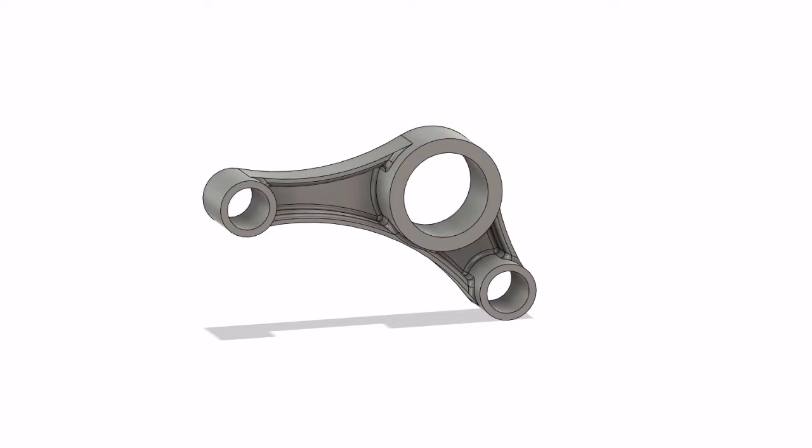Let's begin by first inspecting our 2D drawing. Notice here, on this view, the dimensions are referencing this point. With this in mind, we are going to place our origin here, same with the center point of this hole or circle. Let's sketch this geometry into our XZ plane, so that whenever we head to front view in Fusion 360, this view will be the front.

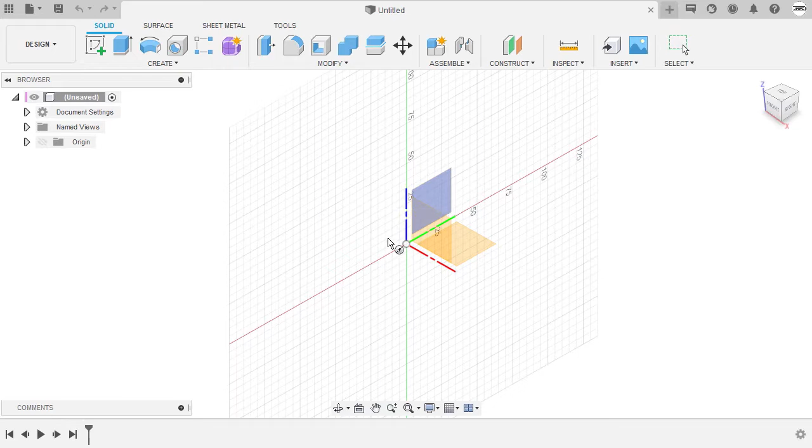Let's head back to Fusion 360. I'm going to hit C for circle, and this automatically leads us to sketch mode. Now we are asked what plane or planar face do we want to sketch to, so once more, we are going to sketch on the XZ plane. Selecting this, let's drop our center point into our origin.

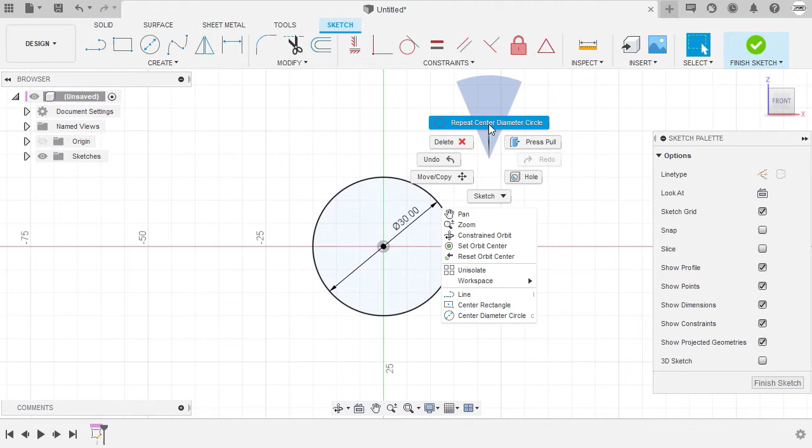The inner circle's dimension is 30. Repeating circle, I can right click, head up and select repeat center diameter circle, and this time our outer circle is 40. Hitting enter, let's clean our dimensions up. Left click and hold to place this here. Selecting 30, left click and hold, placing this here.

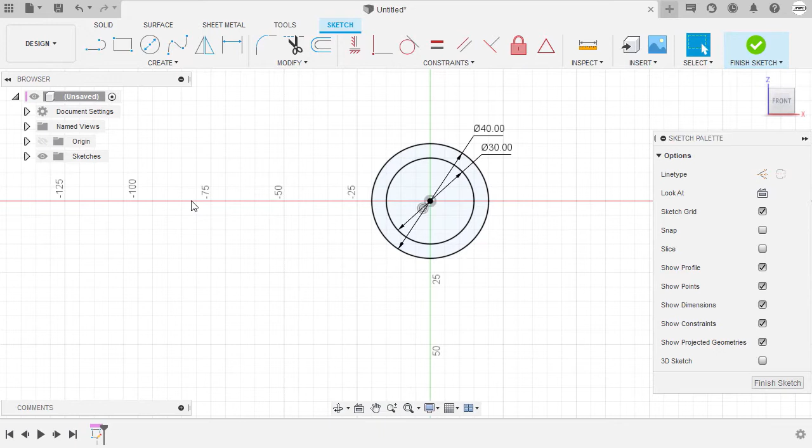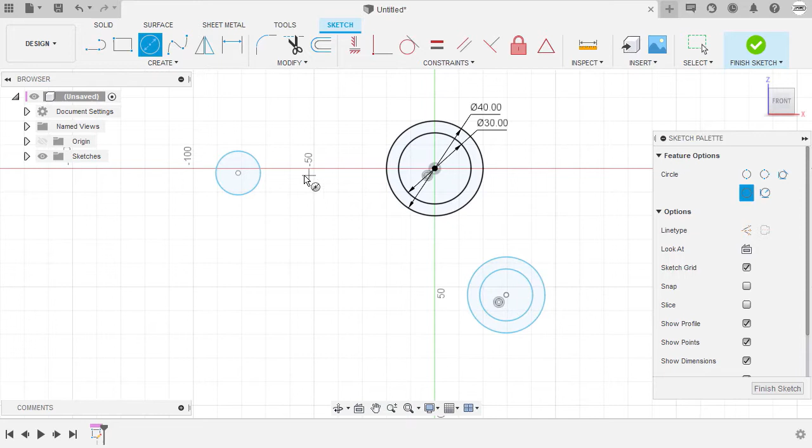Moving forward, let me zoom out and let's create another circle, the one to be placed here, so I'm going to hit C for circle. Let's create a circle here, left click. Notice I did not input any value or dimension for now. Creating another circle somewhere around here, left click. Create another circle, concentric with this circle, left click here. Create another circle here, left click and left click. Hitting escape, and now let's add dimensions.

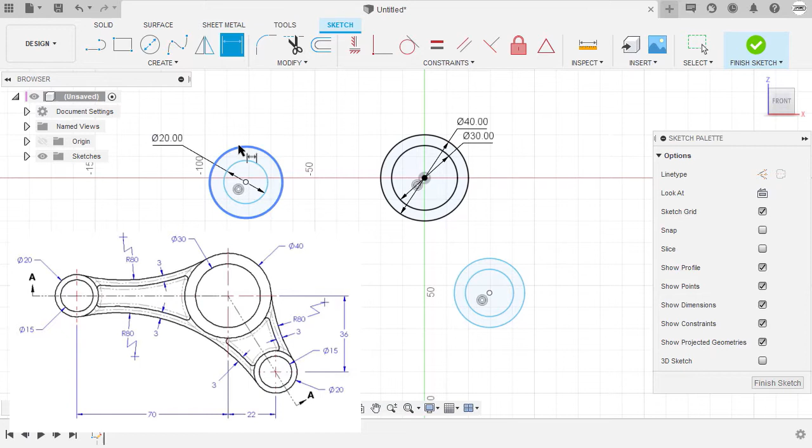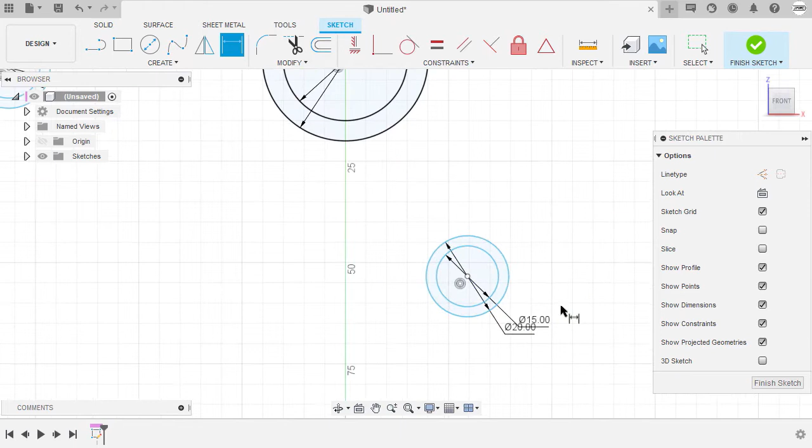I'm going to hit D for dimension. Let's dimension this outer circle to be 20. Dimension tool still active, this one, let's turn this to 15. Next, let's head over to the right. Select this inner circle, this one to be 15. And this circle to be 20. Let me zoom in and clean the position of these dimensions.

Notice the circles here has the same dimensions with the circles here. So with that in mind, I'm going to have the dimensions of the circles over here copy the dimensions of the circle over here intelligently. That intelligence is, I'm going to double click 15. Next, with this dimension highlighted in blue, I'm going to select this 15 over here, which means the dimension of this circle is now the same as this circle, having the parameter dimension or parameter ID of D4. So I'm going to hit enter.

Same with the 20, double left click. With this dimension highlighted, I'm going to select D3, the parameter name of this 20 dimension. D3 now here, I'm going to hit enter. Notice as I change the value of this dimension, let's say 25, this is now also 25. I'm going to hit undo.

Let's add some constraints. Notice here the center point of the circles need to be aligned to our origin horizontally. So I'm going to head up to constraints, selecting horizontal, selecting this center point and the center point or our origin. In addition, notice here, for these dimensions, we plugged in a parameter ID. In addition, I can also select an equal constraint to have these two circles same with the dimensions over here.

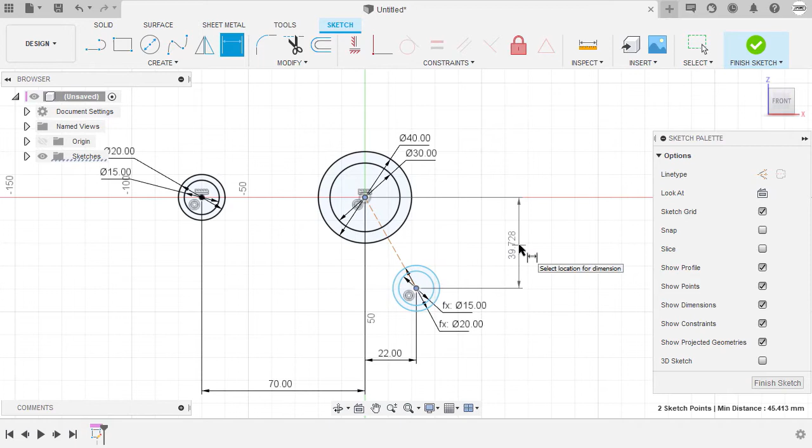Let me hit D for dimension and let's add some dimensions, selecting this center point and this center point. Let's place our dimension here, left click, key in 70. Selecting this center point and the center point, let's place our dimension here, key in 22. Next, selecting this center point and the center point, let's move our cursor to the right. Left click here to place our dimension and key in 36.

Notice before we added dimensions and constraints, all of these entities were once in the color of blue. Notice now it's all black, and in addition, that means these are all now fully defined, as I cannot force to move them any longer.

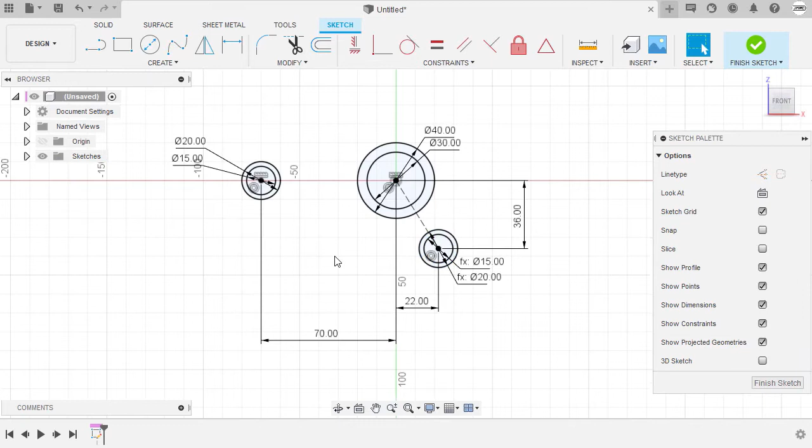Moving forward, let's add the arcs to connect these circles. I'm going to hit S for shortcuts and I'm going to type ARC, and we are going to select 3-point arc. Let me zoom in. Left click here on this intersection and left click here at this intersection. I'm going to move down and notice the inferred tangent constraint on the right.

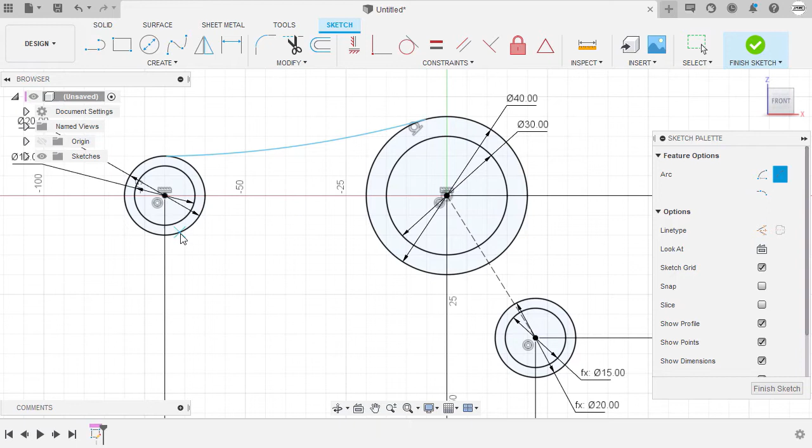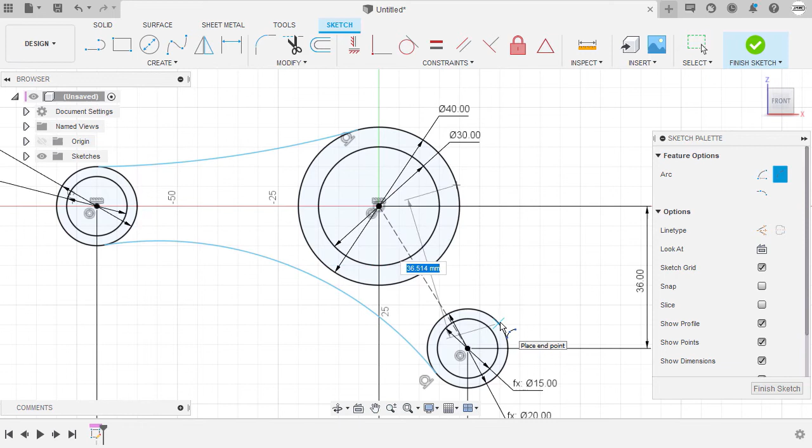I'm going to commit to that. Left click, create another arc from this intersection. Left click here on this circle at the right, notice once more the inferred tangent. Left click, let's drop our point here at this intersection. Left click at this intersection and notice once more the inferred tangent constraint.

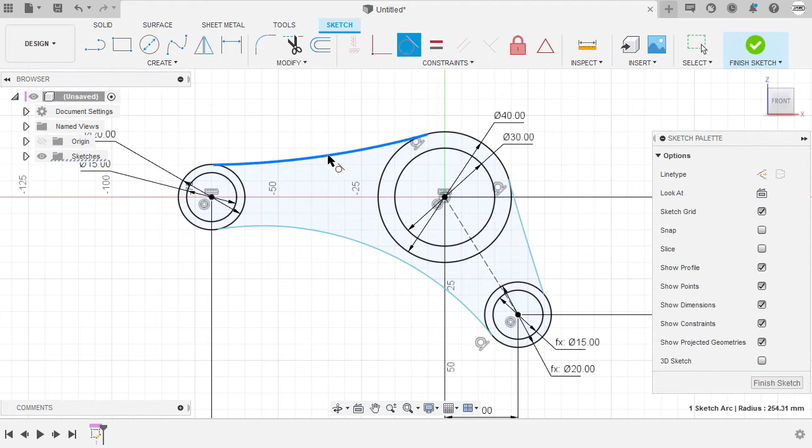Hitting escape. Next, let's add the tangent constraints on these entities. I'm going to head up to constraints, selecting tangent, selecting this arc and this circle, this arc and this circle, this arc and this circle.

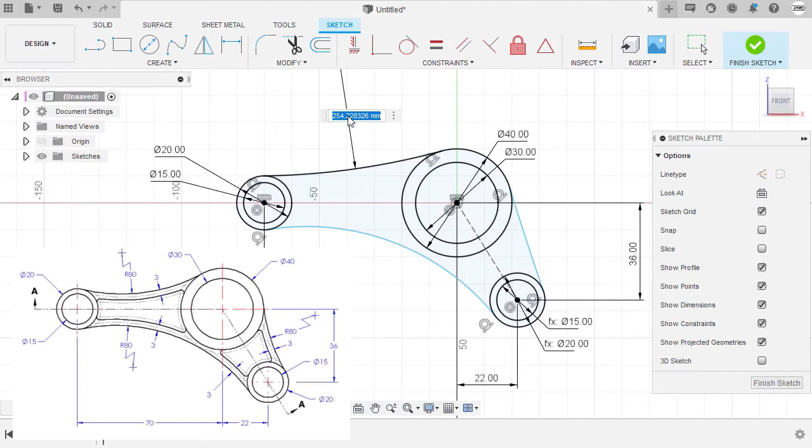Hitting escape. Next, I'm going to hit D for dimension and let's dimension this arc. Let's start off by selecting this arc, the value to be 80, hitting escape. Next, these two arcs also have a radius of 80.

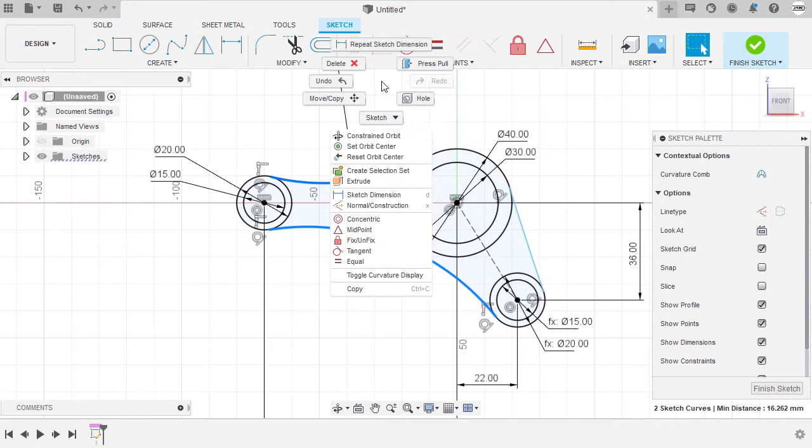So I'm going to select this arc, hold control and select this arc, right click. Once more for you to see, right click and select equal. Notice equal constraint still active. I'm going to select this arc and this arc.

Hitting escape. Moving forward, let's offset these arcs by a value of 3. So I'm going to hit O for offset, and I'm going to disable chain selection. Selecting this arc, I'm going to move this slider down, key in 3.

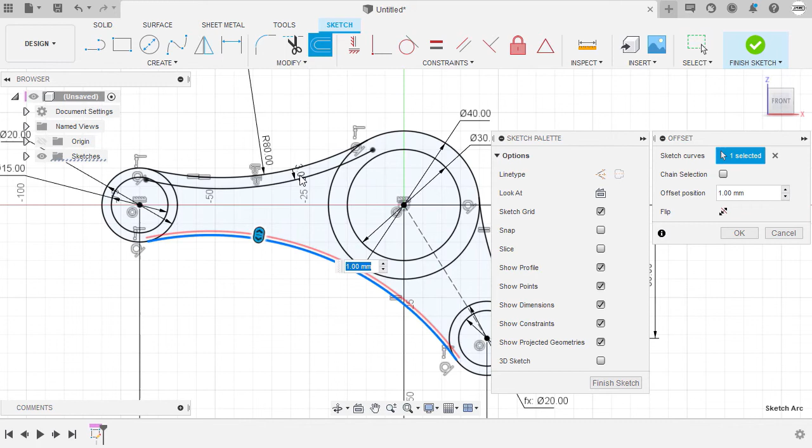Let's repeat offset. I'm going to right click to enable our marking menu, selecting repeat offset, selecting this arc. Next, notice this dimension field is currently highlighted, and I prefer the value of this offset to be 3 as well. So with this highlighted, I'm going to...

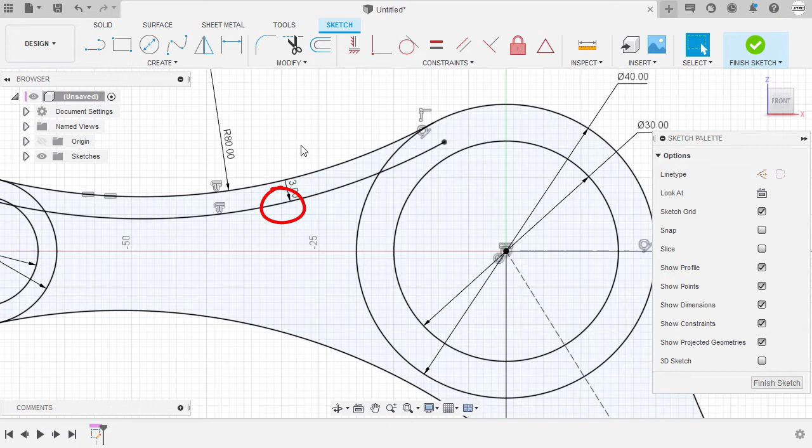identify the parameter ID of this 3 dimension. So I'm going to hit cancel for now. Hover over 3, so notice the parameter ID is D11. With that in mind, I'm going to select offset once more. Select this arc and key in D11. Hitting enter.

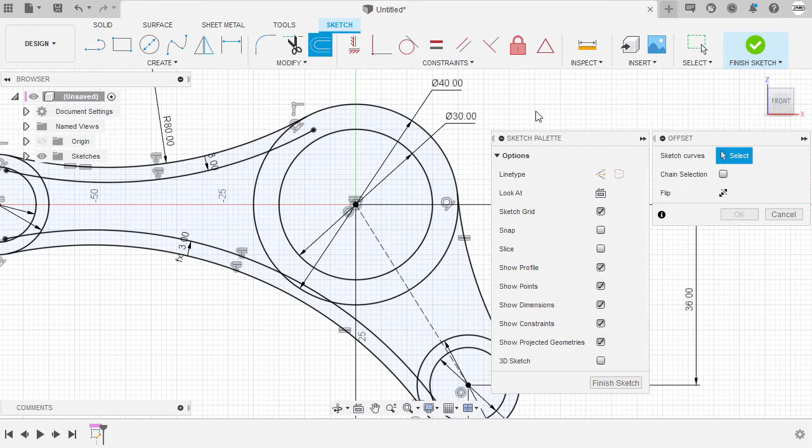Repeating the steps, right click, selecting repeat offset. Let's offset this arc as well and key in D11. Hitting enter. Let's trim out the excess entities.

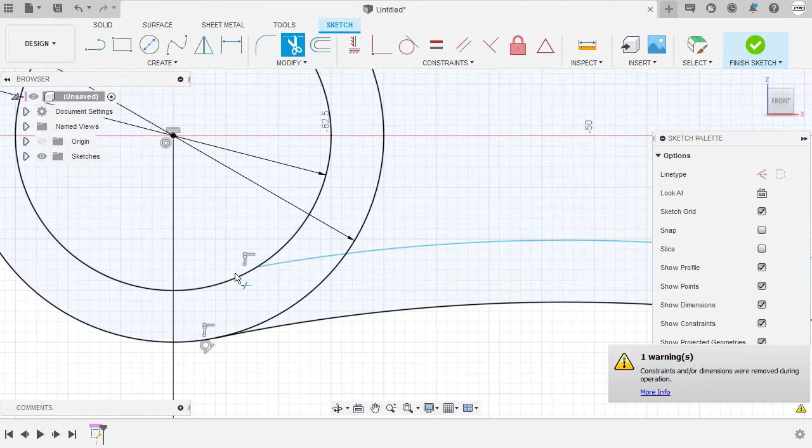I'm going to hit T, which is the shortcut for trim. Let's start by trimming out this excess arc segment. Notice, whenever we do trim, we may possibly lose a constraint or dimension. Selecting this portion of this arc. Let's trim this one. Left click this one. Let's trim out this one.

Selecting this, let's move to the other arc, trimming this out. Let's trim this out, same with this arc segment. Hitting escape. And notice, we lose all of our dimensions.

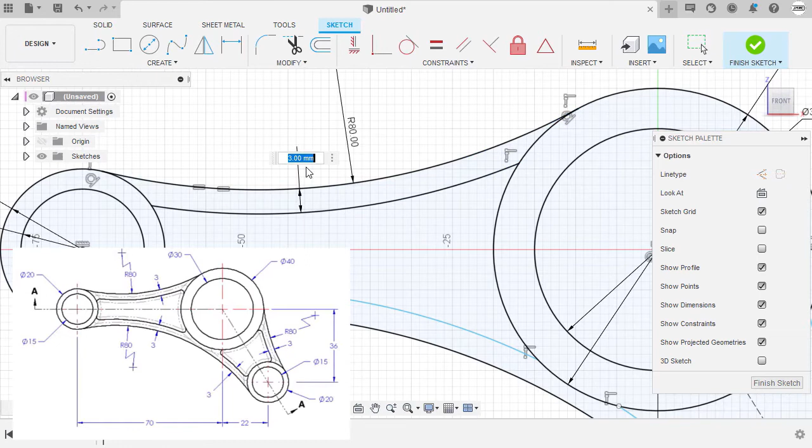So I'm going to hit D once more. Let's dimension the distance between these two arcs to be 3. I'm going to hit escape and let's identify the parameter ID of this dimension, which is D14.

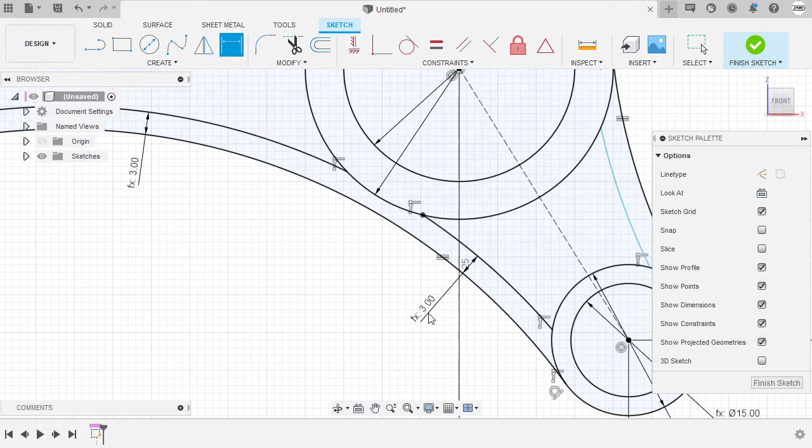Hitting D for dimension, let's dimension this to D14, hitting enter. Same with these arcs, D14. And finally, selecting this arc and this arc, key in D14.

Hitting escape. Our sketch is now fully defined or fully constrained. And from here, we're going to select Finish Sketch.

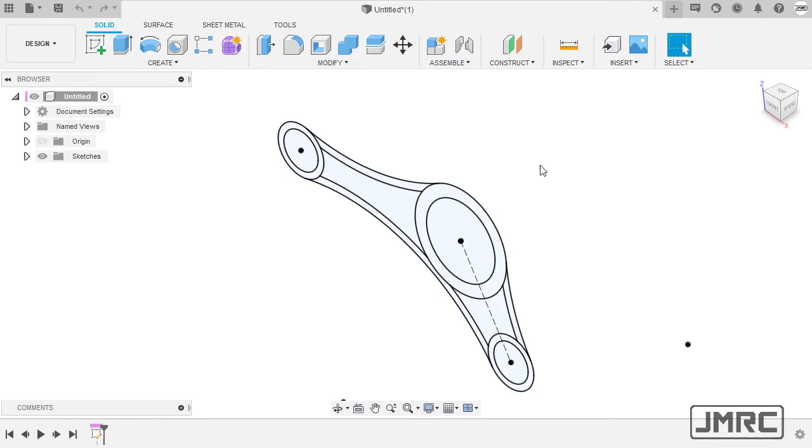Let's turn this sketch into 3D. I'm going to hit E, which is the shortcut for extrude. And for our target profiles, it will be these 3 cylinders.

Next, I'm going to pull this arrow to the left. And for the distance of the cylinders, because we are in the negative direction, I'm going to key in -20. Operation, new body, selecting OK. Notice, because these bodies are not touching each other, in this instance, we have created 3 separate solid bodies.

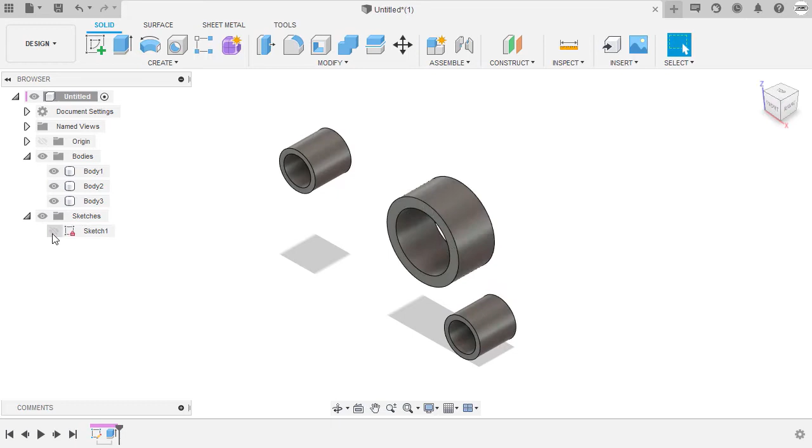Let's reuse our sketch 1, and I'm going to turn on its visibility by selecting this eyeball. Let's hit E for extrude and select this profiles. Notice I have 5 profiles selected.

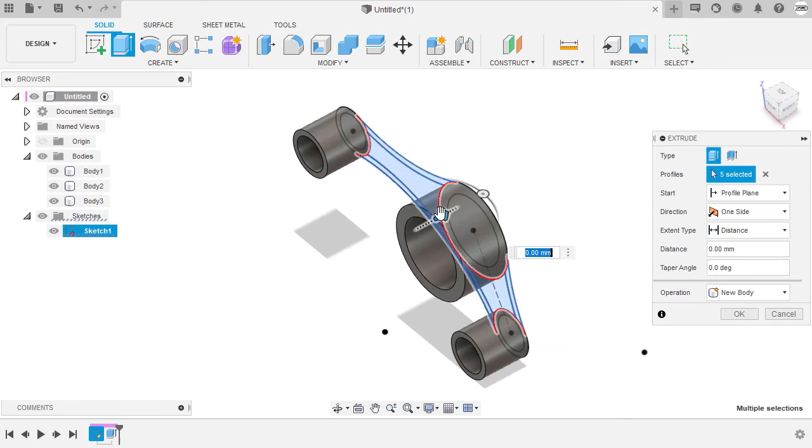Let's move this arrow, and to be exact, I'm going to key in -12. And for the operation, we're going to change this to new body. Selecting OK.

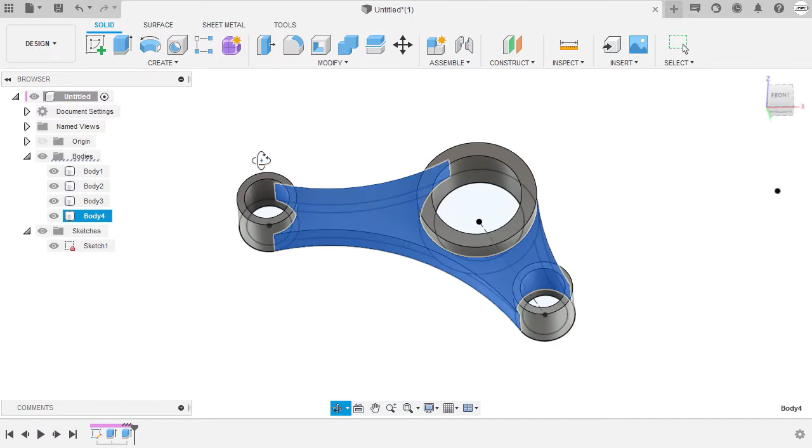Moving forward, let's hollow out this body by applying a shell. So I'm going to head up to modify, and before that, let's turn off the visibility of these 3 cylinders. Together with our sketch 1, let's now head up to modify and select shell.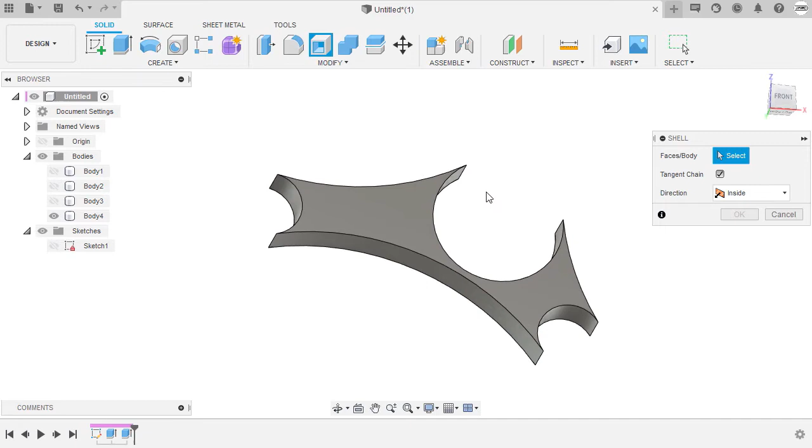Now for the faces or body, I'm going to exclude these faces. Holding control and selecting this face as well and this face. For the inside thickness, it will be 3.

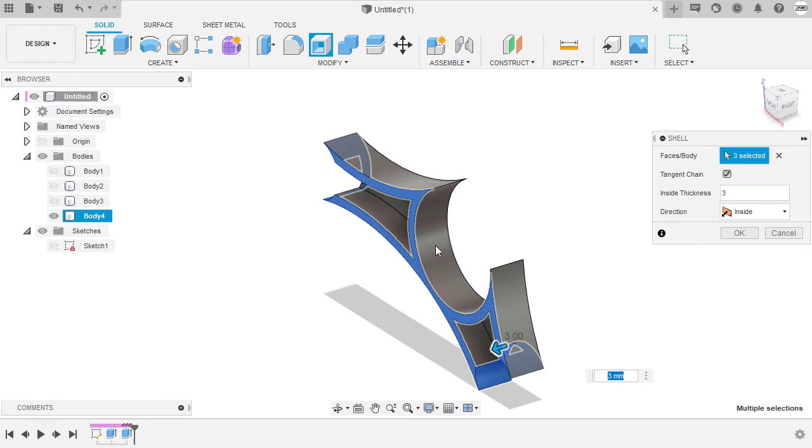In addition, let's also add this face as well. So holding control and left click. Inspecting, let's now select OK. So take note of its direction to be inside.

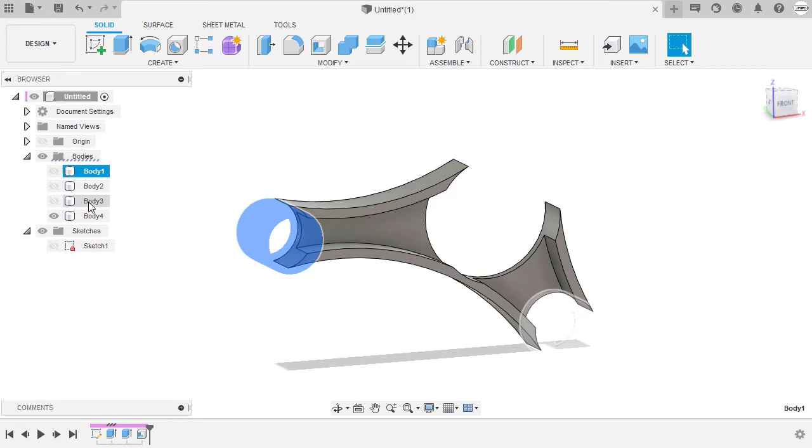Next, let's turn on the visibilities of these bodies. I'm going to select body 1, hold shift, and select body 3. And the shortcut for turning on its visibility is simply hitting V on our keyboard.

And finally, I'm going to head up to Modify and select Combine. Target body, any of the four will do. Let's select body 4. And for the tool bodies, let's select these 3 cylinders. Operation to be joined, and I'm going to disable new component and keep tools. Selecting OK.

Let's wrap things up by adding fillets. The shortcut for that is hitting F. Let's now select all of these edges.

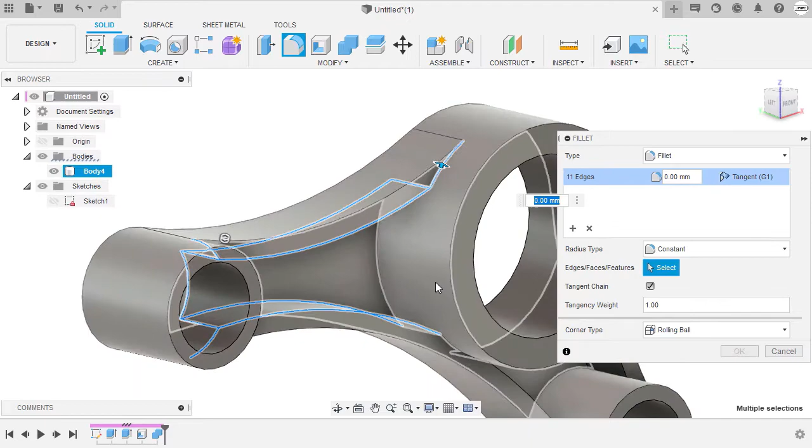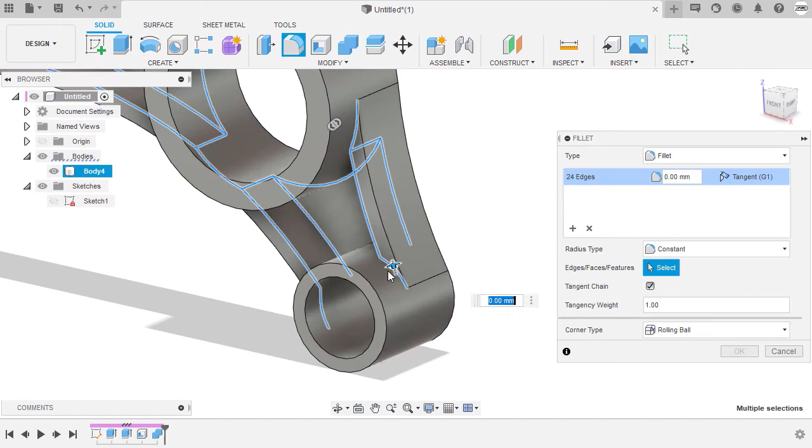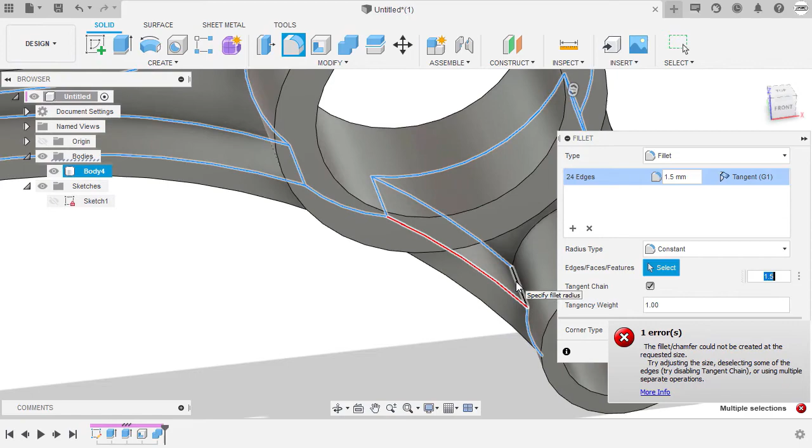Selecting this edge, selecting this edge. This edge and this edge. The radius to be 1.5. Notice we have an error. As we select all of the target edges, this error will soon be gone. Adding this edge as well. And this edge. Let's check. Okay, so the error is now gone. Leaving the defaults, selecting OK.

And congratulations for completing phase 1 of this 2013 Model Mania Challenge.

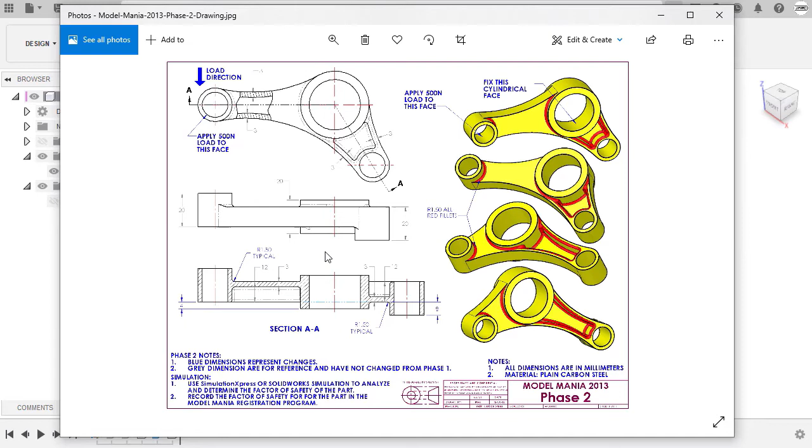Welcome back for the Phase 2 of Model Mania 2013. And the prominent change for Phase 2 is notice the cylindrical bodies have a new position. Let's now head back to Fusion 360. I'm going to move my timeline marker, left click and hold before shell was created. And notice here we have 4 separate bodies. What we're going to do next is we're going to move our body 2.

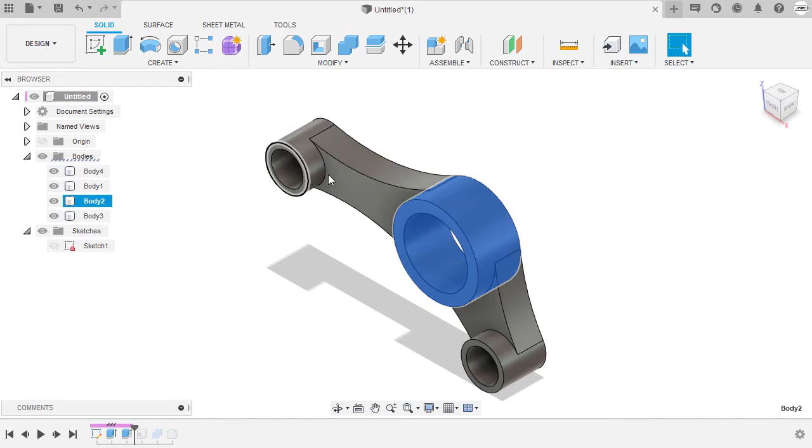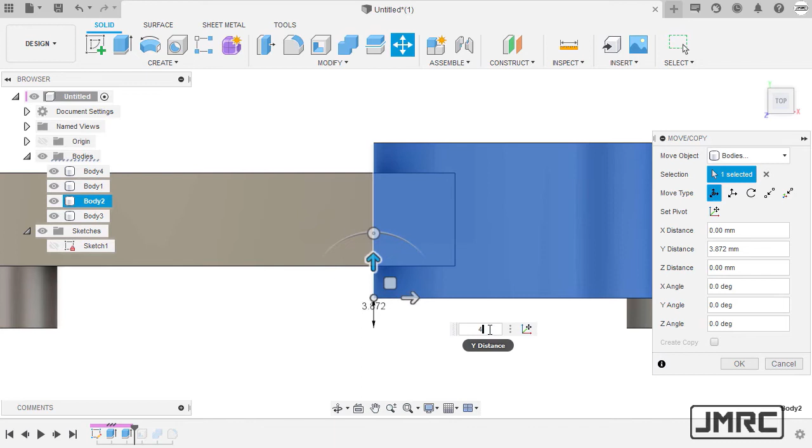So selecting body 2, let's head over to our top view and select this curved arrow pointing to the left. I'm going to zoom in. With the body 2 selected, I'm going to hit M for move. I'm going to move this body up. And to be exact, we're going to key in 4. Selecting OK.

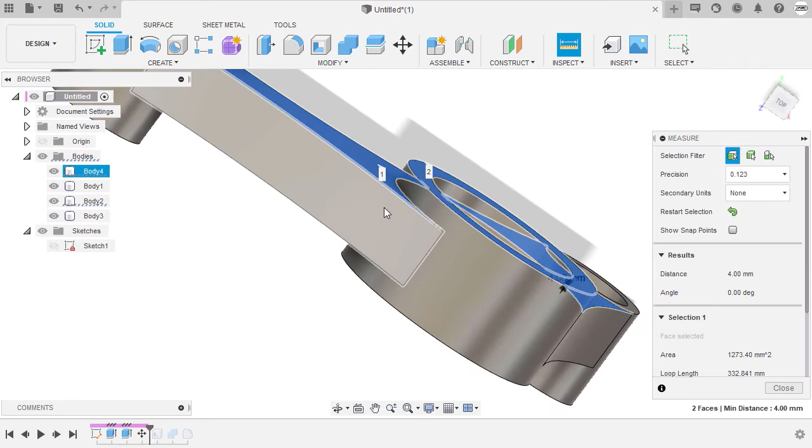And let's check if this body is at the middle. I'm going to hit I for measure, selecting this face and this face. The distance between them is 4. Let's restart selection. Now the distance of this face and this face should be 4 as well. So we're on the right track. Selecting close. Let's head back to top view.

And this time we're going to move body 3 up. With body 3 selected, I'm going to hit M for move. And let's move this body up, the edge of this body collinear with this edge. And to be exact, we're going to key in 8. Hitting enter.

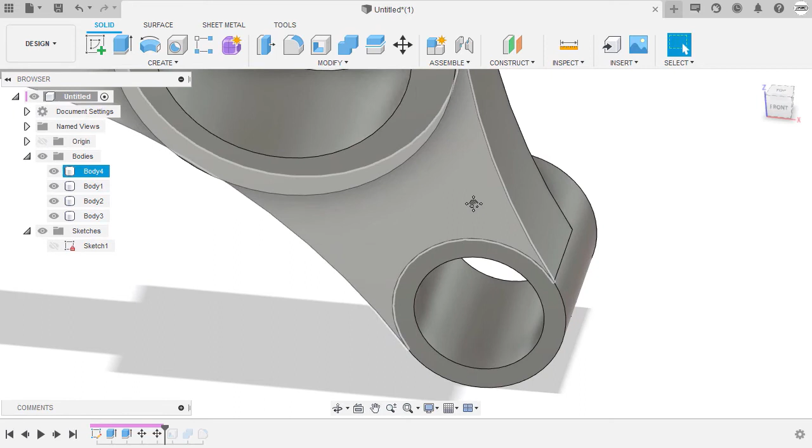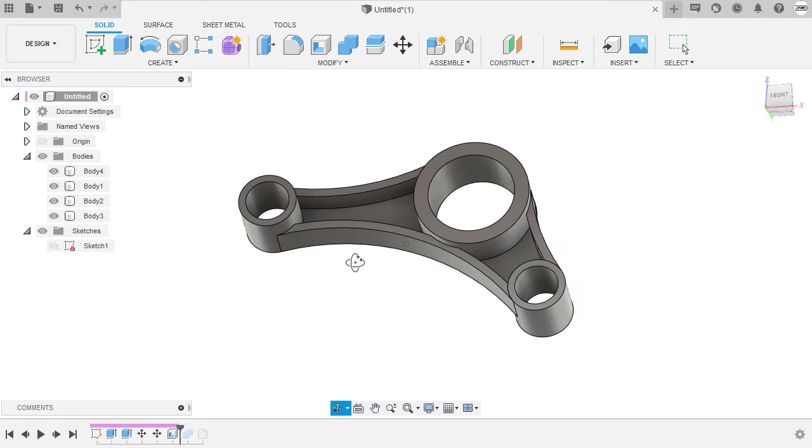And let's inspect. I'm going to hit I for measure. The distance of this face and this cylinder's face should be 0. So let's select this face and this face. So correct, it's 0. Let's now select close, head to our home view. Let's unsuppress the shell and inspect, moving our timeline marker, inspecting. Next, let's unsuppress combine.

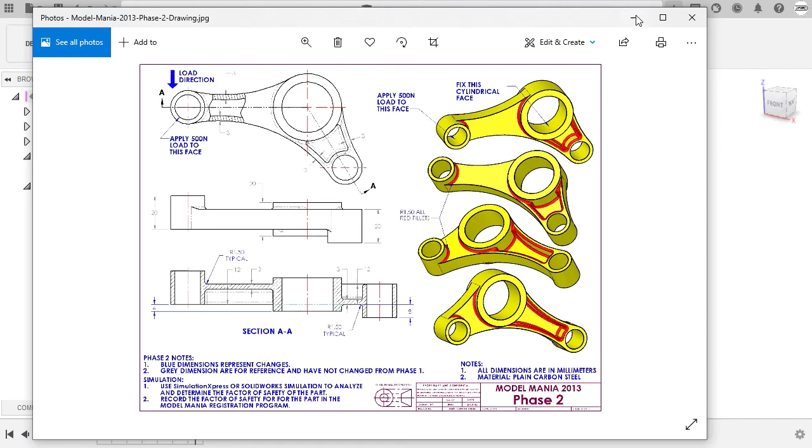Let's grab our 2D drawing and notice this time the thin wall feature is reversed and placed to the other side. Heading back to Fusion 360. Moving forward, our next intent is to move this feature parallel with this face. And for my personal preference, what I'm going to do is head over to Surface tab, and under Create, we're going to select Offset.

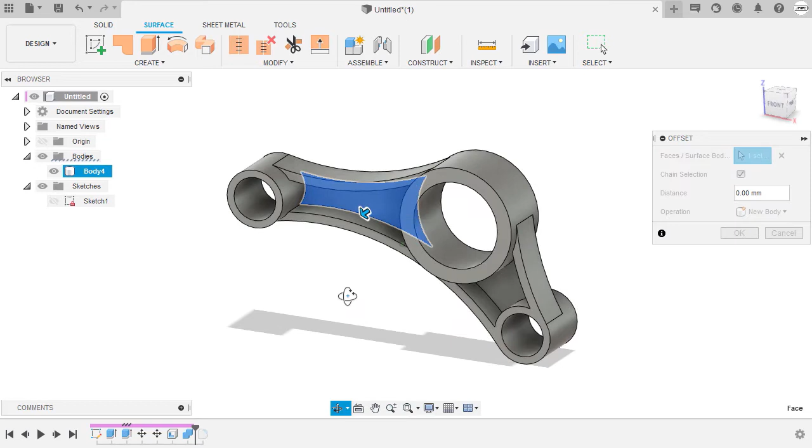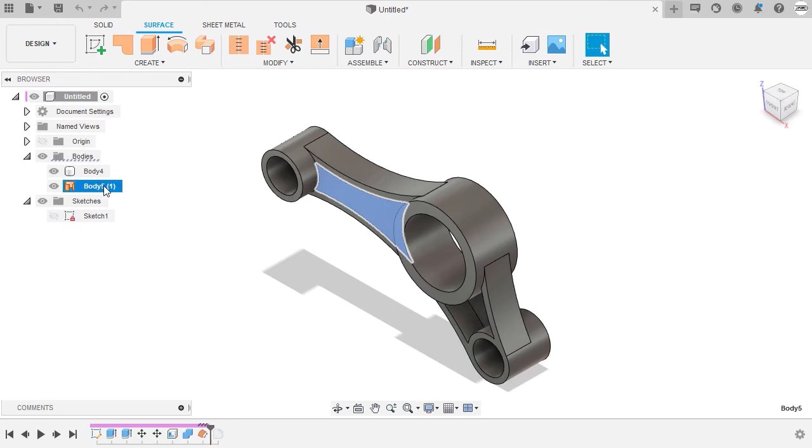The target face would be this face. Next, let me move this arrow. And to be exact, I'm going to key in 9. Let's inspect, Operation new body, and selecting OK. Moving forward, let's turn this surface body into a solid body. And to do that, I'm going to hit S to grab our shortcuts, typing TH and selecting thicken.

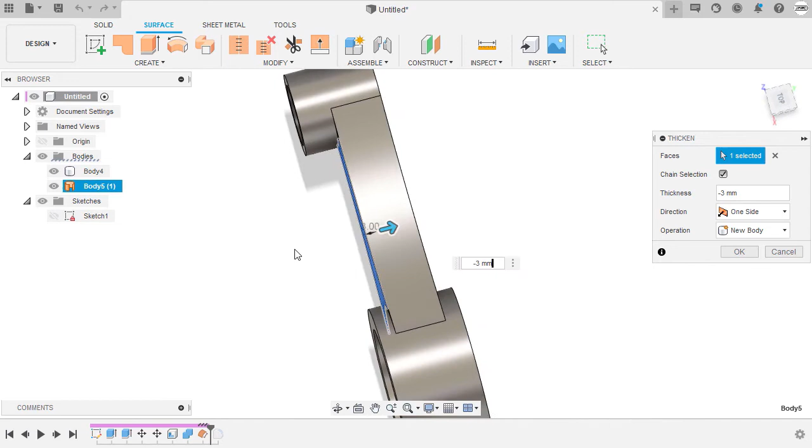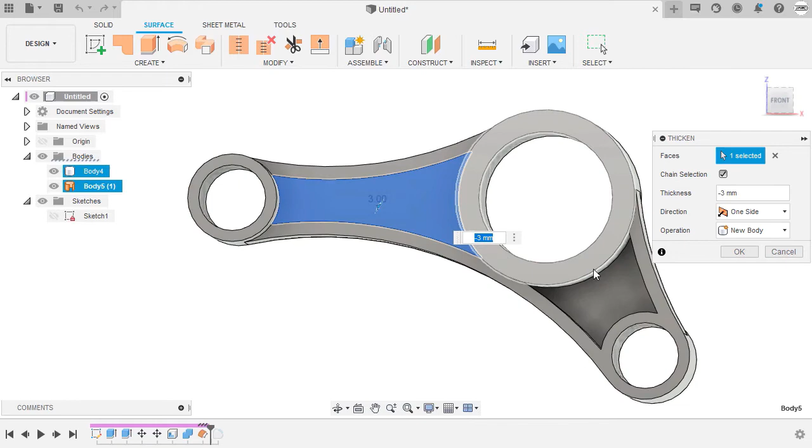Let's move this arrow to the other side and key in -3. And for us to see the change, I'm going to head over to top view and rotate this. Notice here as I press Ctrl 7 for wireframe view, this is now the new solid body. Heading back to shaded view, which is Ctrl 6, and Operation new body, selecting OK.

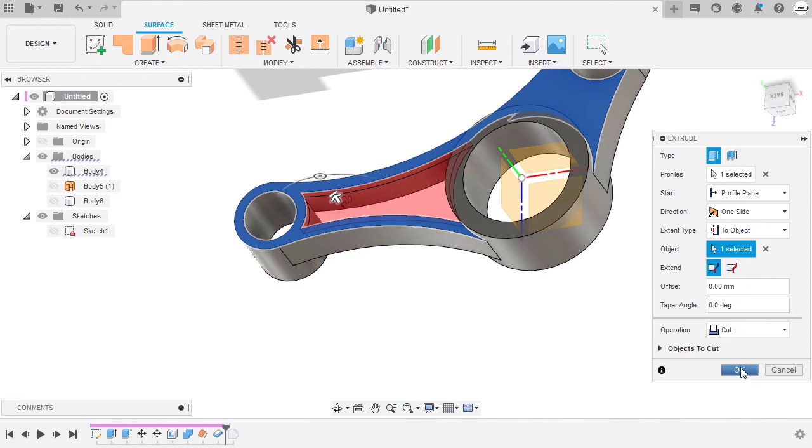Let's now remove this material over here. Let me turn off the visibility of body 6. Next, I'm going to select this face and hit E for extrude. Let me move our arrow to the other side. And for the extent type, I'm going to change this to object. And that will be up to this face. So notice the material removed. Operation cut, selecting OK. Let's now turn on the visibility of body 6.

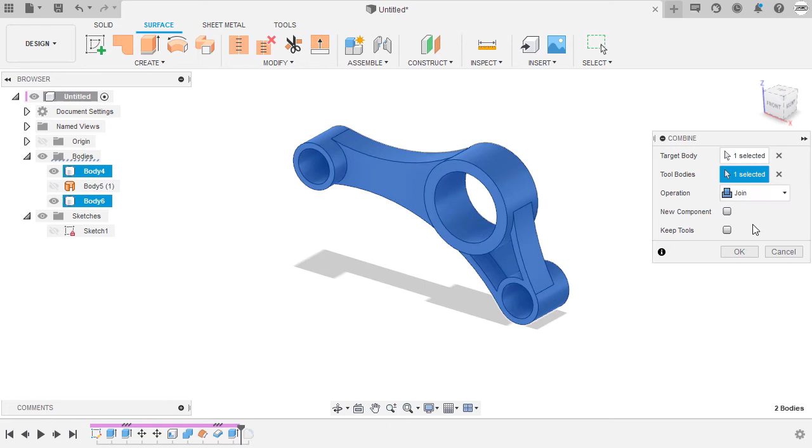Once more, hit S for our shortcuts, typing CO and selecting combine. Let's now combine these two solid bodies, selecting body 4. For the tool bodies, selecting body 6. Operation join and selecting OK. Let's now unsuppress our fillet. And notice it has errors, so I prefer suppressing this once more. Reselecting our fillet, right click and suppress features.

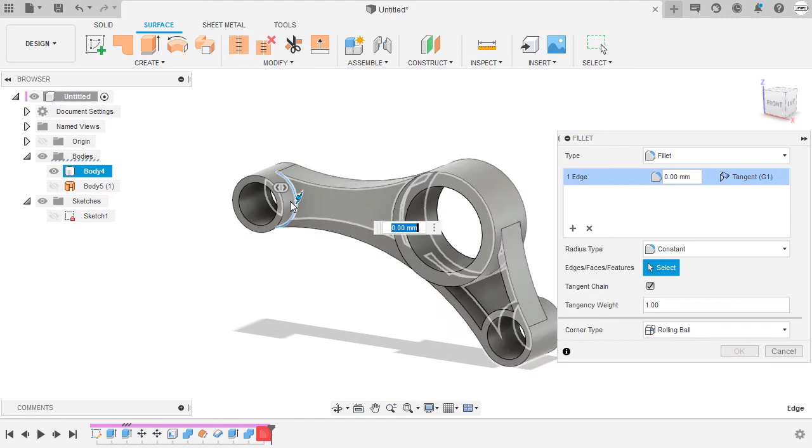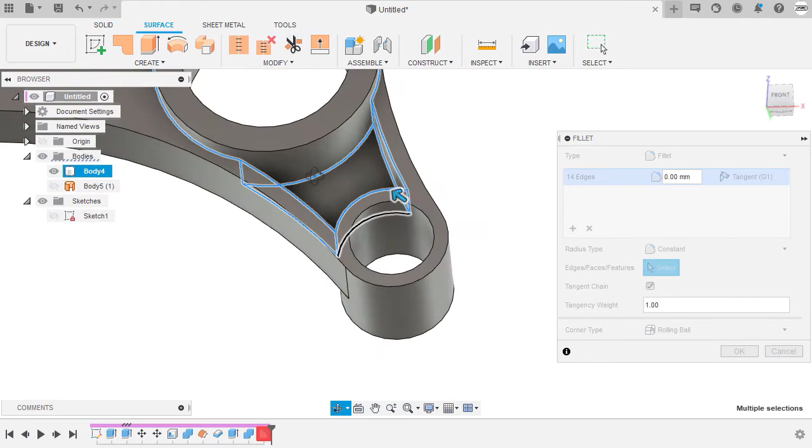Let's add a new set of fillets, hitting F, and let's select these edges. Selecting this edge, this edge, this edge, this edge, this edge, this edge, this edge. Let's head to the back.

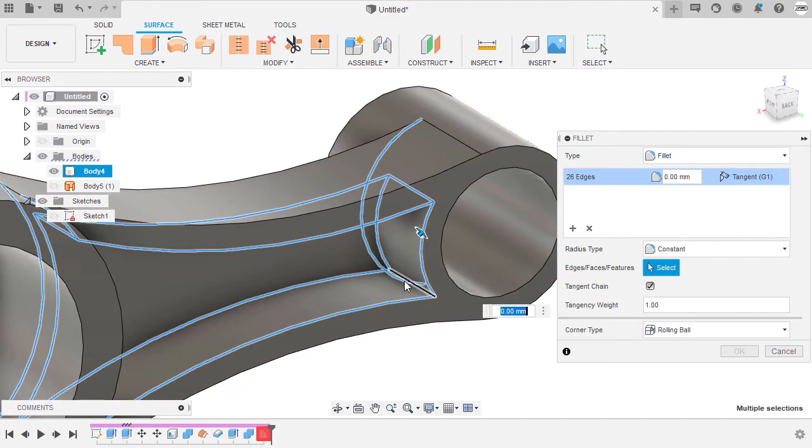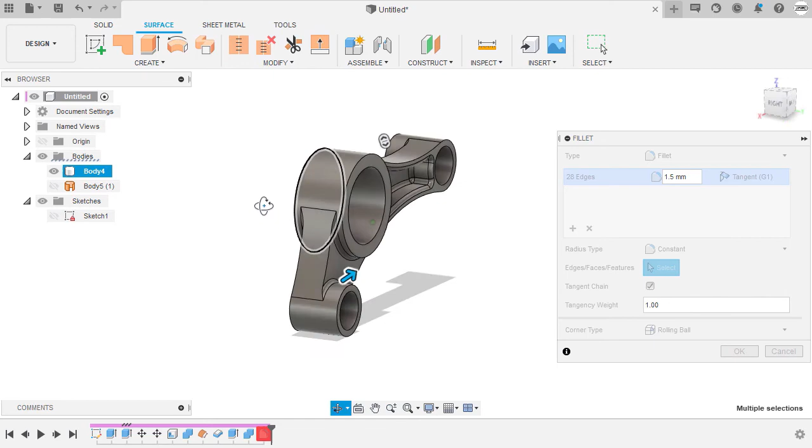Selecting these edges. Selecting this edge, and this edge. Also this edge. And for the radius, once more, it's 1.5. Inspecting once more. Leaving the defaults and selecting OK.

And congratulations for completing our phase 2. And join me in the next video as we conduct a simulation study to determine this model's factor of safety.

Let's now create a simulation study. And before that, let's clean up our bodies. I'm going to select the surface, right click, and select remove. The advantage of remove is we can still bring back that surface by simply suppressing this or deleting that remove command. Hitting undo. Next, let me delete this fillet that we had in the previous phase.

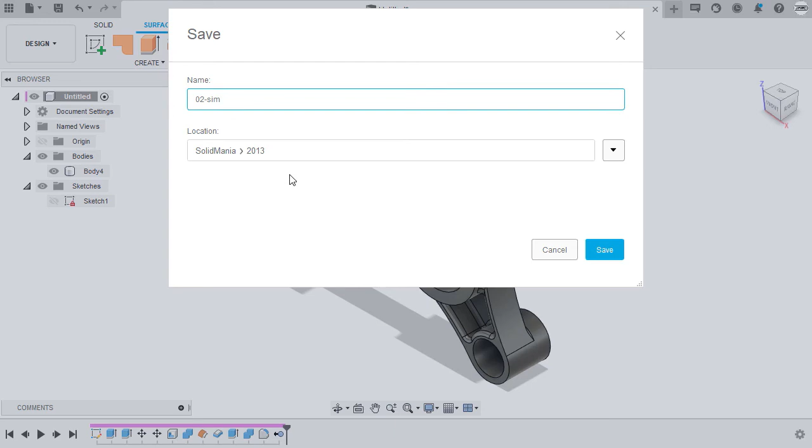Hitting delete. And an important reminder, in order to perform a simulation study, this model needs to be saved in the cloud. Let's now save this model by hitting Ctrl S or selecting this diskette. Let's name this as 02-sim. And now let's select Save. Model saved in the cloud.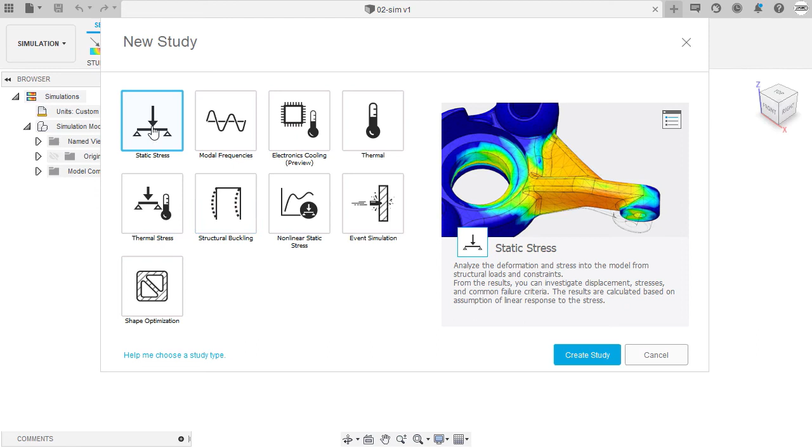We are currently in the design workspace. Let's now change our workspace to simulation. Prompted to select a new study, let's select static stress. Double left click on this. And before we begin, I want you to take note of a pre-check. So notice it is now an X mark.

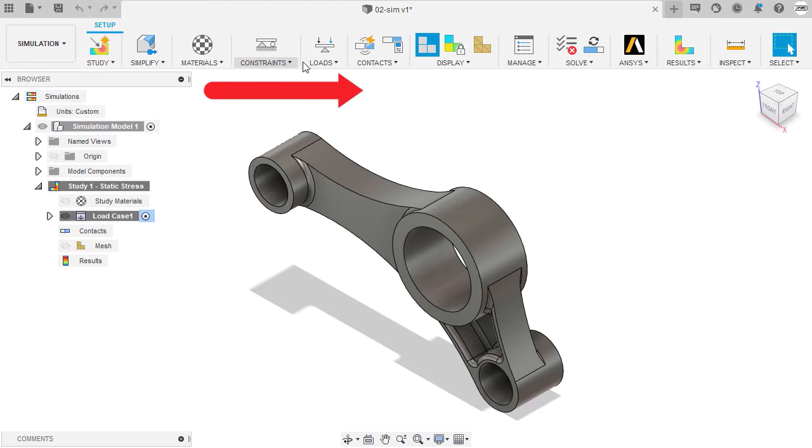Notice as I click pre-check, it gives us the list of requirements to be done in order for us to finally select solve. The typical workflow in conducting a static stress simulation is from left to right, which means we must first define the materials, constraints, loads, and moving to the right, finally selecting solve.

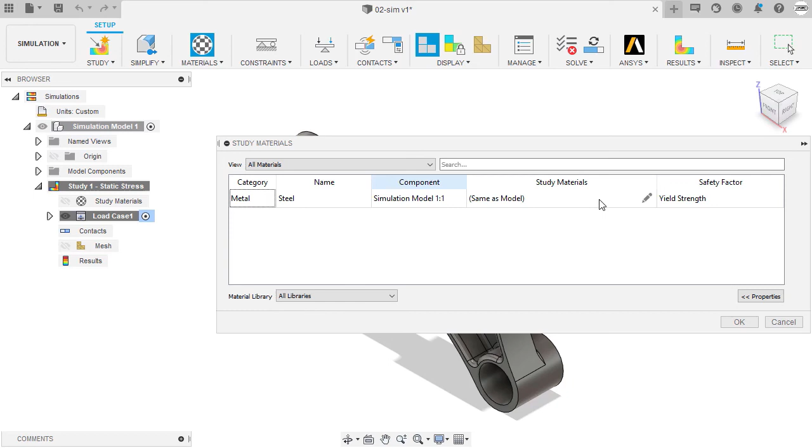Let's now define the material. Heading over to materials, selecting study materials. Let's head over to this drop down and look for plain carbon steel. Scrolling down, and let's select steel carbon. Selecting this, selecting OK.

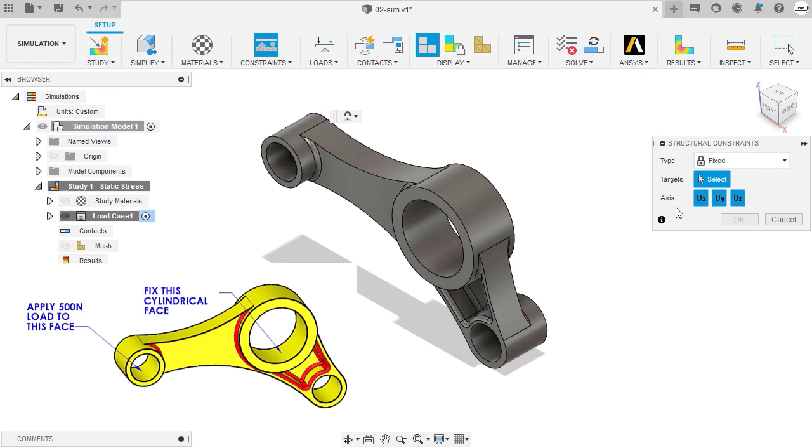Next, let's define the constraints. Selecting structural constraint. For the type, it will be fixed. The axis, let's enable UX, UY, UZ. For the target, it will be this cylindrical face. Selecting this, selecting OK.

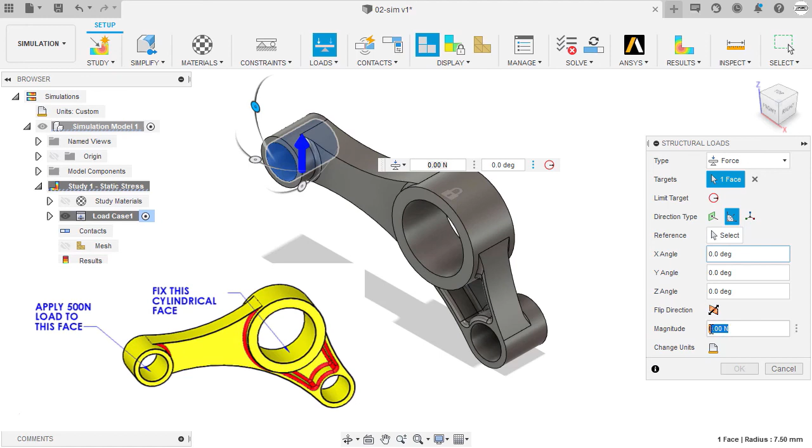Let's now apply loads. Heading over to loads, selecting structural loads. The type to be force and the target to be this cylindrical face. And for the force, it will be 500 newtons. In addition, make sure under change units, the unit is Newton. Typing in 500 for the magnitude. Next, let's define the direction of the force. I'm going to grab this rotate handle, and to be exact, let's key in -180.

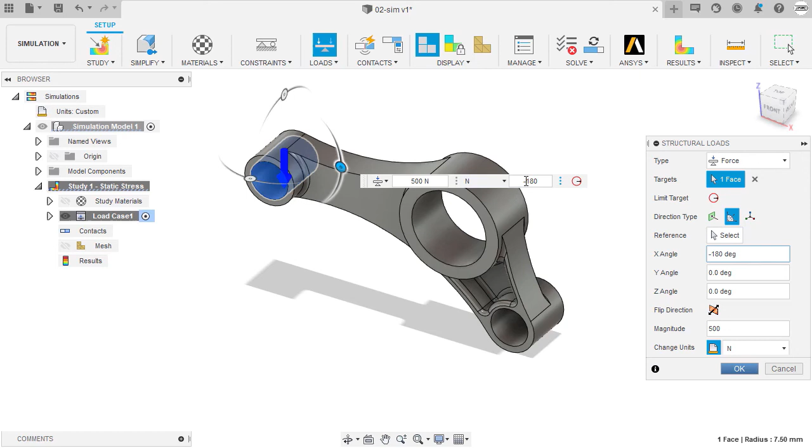And finally, selecting OK. Notice under pre-check, it's now a green check mark, which gives us the green light to finally select solve. Let's now select solve. And notice here we have two options: to conduct the simulation using the cloud or locally using the processing power of our machine. So let's save some cloud credits, selecting locally and selecting solve.

Simulation done. Notice we have a factor of safety minimum at 4.82. Selecting close. Notice on the right, we have here our color bar. And under safety factor results, our result for the factor of safety is at the green region, denoting our design is satisfactory. The highest would be reaching this blue region.

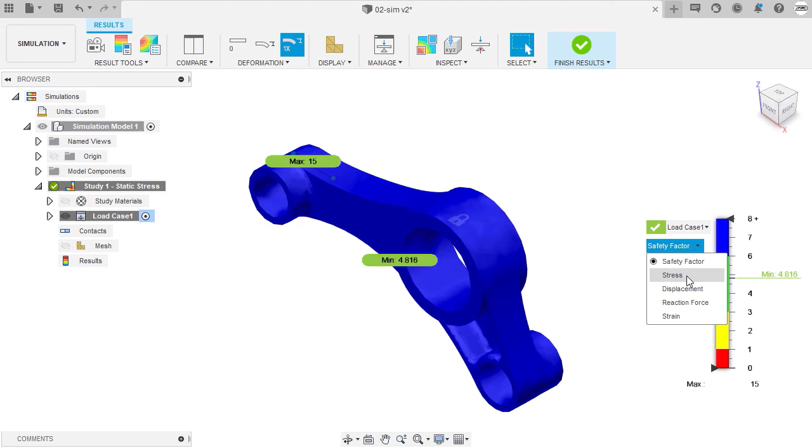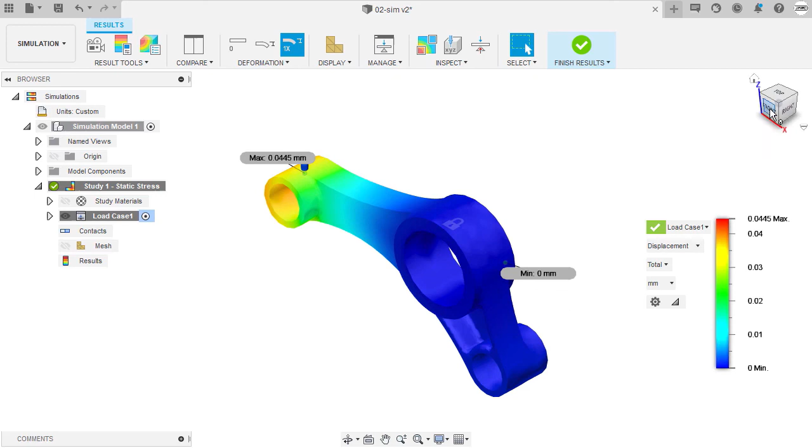In addition, under this drop down, we have the options to view the results for stress. Once more, let's move this triangle. Moving forward, we can view the displacement, the reaction force, and the strain. Let's head over to front view, and under displacement, we have the option here for deformation. We can view the model undeformed, the actual. So notice the actual is almost no deformation, but take note, the deformation is very small. And this one, the adjusted, gives us an exaggerated result.

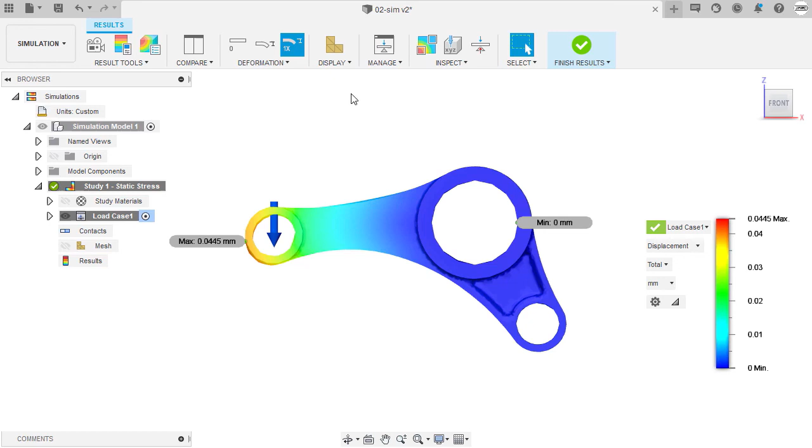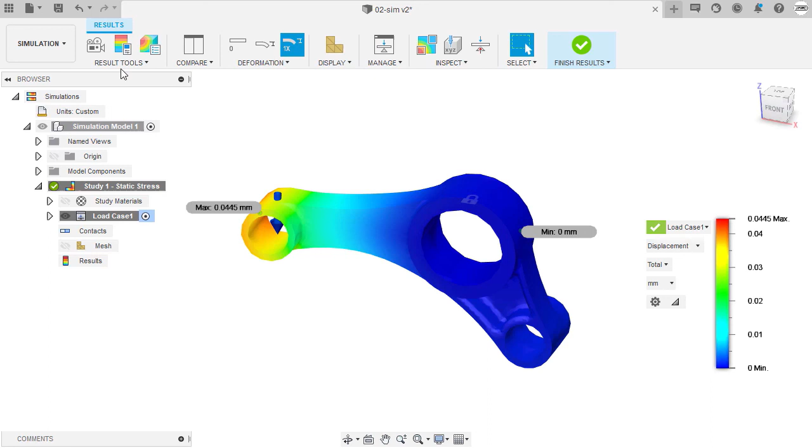In addition, take note, mesh plays an important role in the calculation of the study. The higher the mesh resolution is, the more computing power it requires. So notice here, we can toggle the mesh visibility. And lastly, under results, let me show you animate. But before that, let's change the results view to stress. Heading back to animate, let's head over to front view. And let's enable two-way and hit the play button.

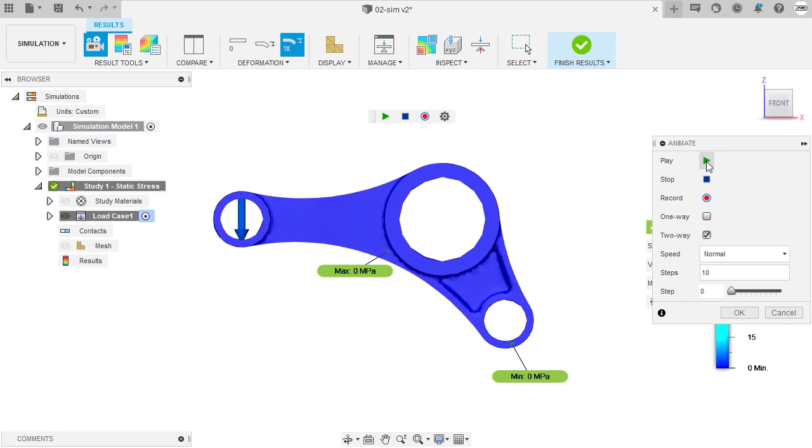From here, I'm challenging you to conduct a static stress simulation study on the Phase 1 model. The question is, which of the two has a greater factor of safety? And that's conducting a static stress simulation study using Model Mania 2013 in Fusion 360.